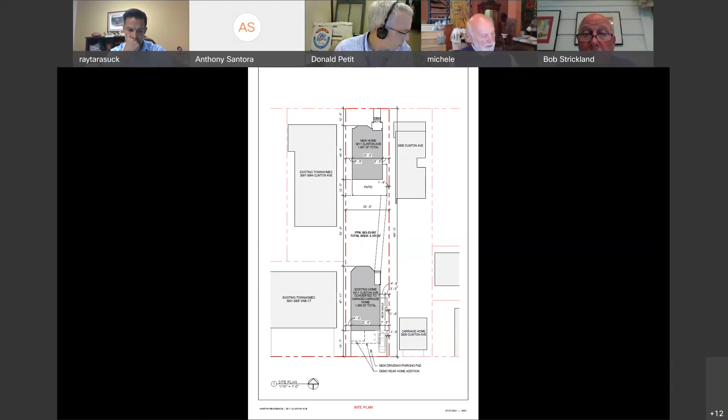Mr. Chairman, I'll just remind the commission that we saw this project as a concept plan on July 8th. There are actually two items to act on today. It's one project, but there are two buildings at 3811 Clinton, and we should review and act on both of them today, items 1 and 2. Do we need to treat each one individually or combine them? I think the presentation combines them both.

Okay, thank you. Excellent. Thank you very much, and good morning, everybody. Thank you very much, Don, for the information on the last Landmarks meeting. I will also note that last week we received approval from the Ohio City Design Review. So we now have Block Club approval and Ohio City Design Review approval for this plan proposal, for both new construction as well as the modification and rehabilitation of an existing structure on the lot. So just very quickly to highlight the scope of this project, this site plan here illustrates the project in its entirety. There is an existing home on the southern portion of the lot, which you see at the bottom of the site plan.

That house was moved, this is from Bob Strickland. Excuse me for a minute, Karl, I'm not seeing any presentation at all on my screen. I can see the participant panel at the top, but I've got a blank screen. It's labeled as Karl Brunjes's screen, but I'm not seeing anything.

I can see the presentation, Karl, on my screen here, just to let you know. I can as well, I can as well. Should I sign out and sign back in, Karl? That might help, if everybody else is seeing it, then it might be an issue on your end right now. Okay, I'll be leaving momentarily and then I'll come back. Just go ahead and continue. I'll join you. Okay, got it.

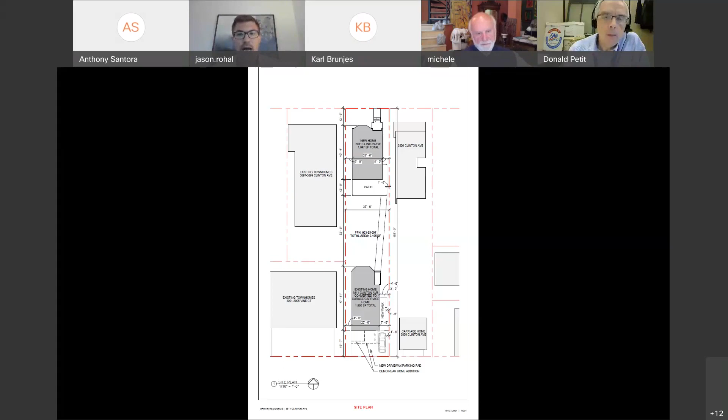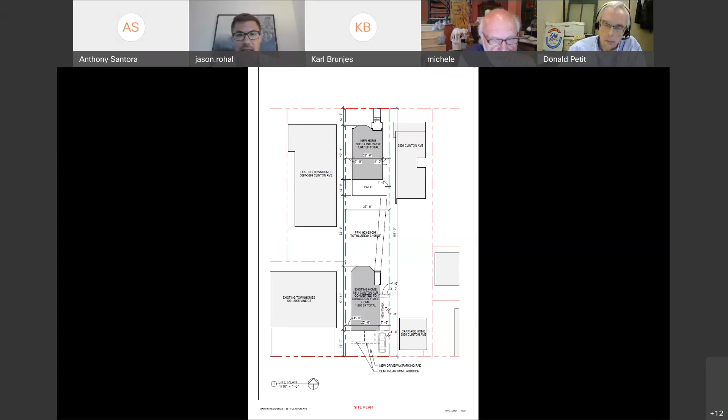So in the site plan here, you can see the existing home on the southern portion of the lot, which was moved from Tillman Avenue in the 1960s, and also on the northern portion of the lot, proposed new construction, just to the west, also a new home being built concurrently. If you could please advance to the next slide and keep going until we come to the north elevation of the new construction home.

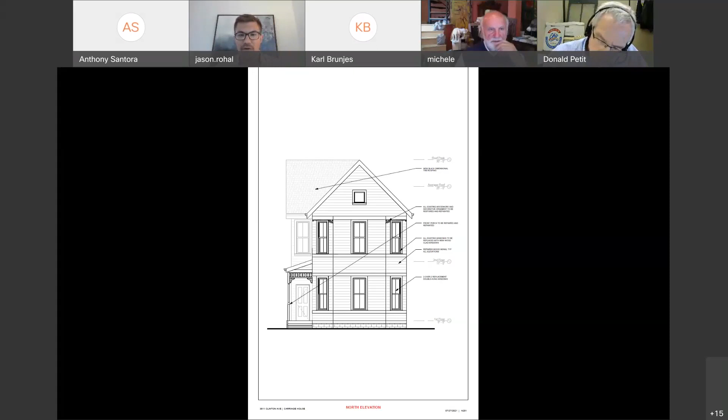This elevation shows in detail the proposed restoration of the home. Currently it is in disrepair. It is a wood-sided house, and we are proposing to replace with wood clad windows in a 2/2 double hung configuration. Any repairs and modifications will be using wood siding.

In some subsequent slides, we have the materiality, or proposed color scheme, for the existing home at the rear of the lot. This shows any historical ornament currently existing that has fallen into disrepair. We propose to bring that back, renovating historically using historically appropriate materials and fenestration.

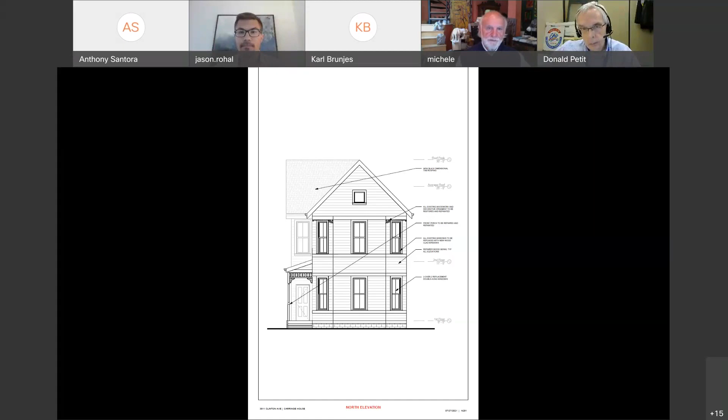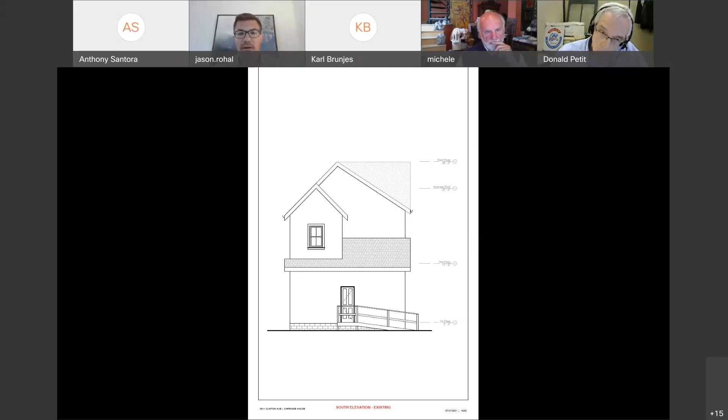On the subsequent slides, the other portion of the rear home involves a proposed modification. We've been doing some digging and engaged a local historian, Tim Barrett, who has been out to the site and walked through the property with us. We are also proposing, in addition to restoring the principal facade, the removal of a portion of the home at the rear that faces Vine Court.

If you wouldn't mind advancing to the next slide, please. The previous slide shows the existing conditions; this slide shows the proposed new facade, which allows the home to be converted to a carriage home.

Two wood paneled garage doors are added on the southern facade, with an overhang placed at that facade. Light fixtures illuminate the area off of Vine Court, along with new windows added on the southern portion of the house that match in size and configuration with the other facades. If you wouldn't mind advancing to the next slide as well, please.

So current existing conditions here, and the next slide will show the proposed modifications. And then the next slide as well, please, and then the subsequent slide will show the proposed modifications.

And then here we see the existing home. Again, we consulted with Mr. Tim Barrett on some historically appropriate color schemes for the home. All of the band boards, any trim that's found is going to be restored and kept. We're proposing Sherwin-Williams Roycroft copper red for the main body of the home, with the trim and accent colors shown as well here, as well as light fixtures proposed for the home. And I believe the only other slides here just show the massing of the modifications.

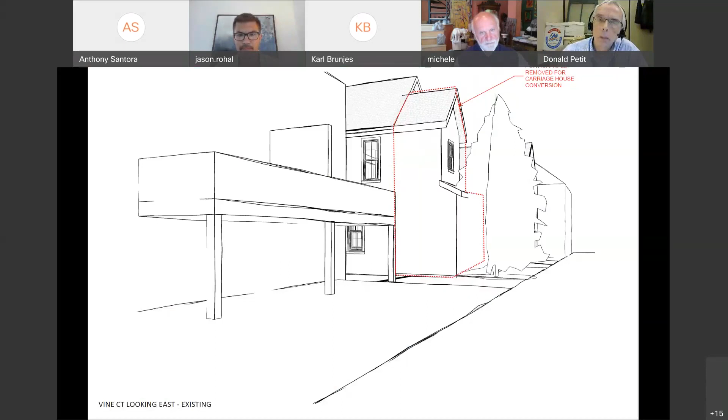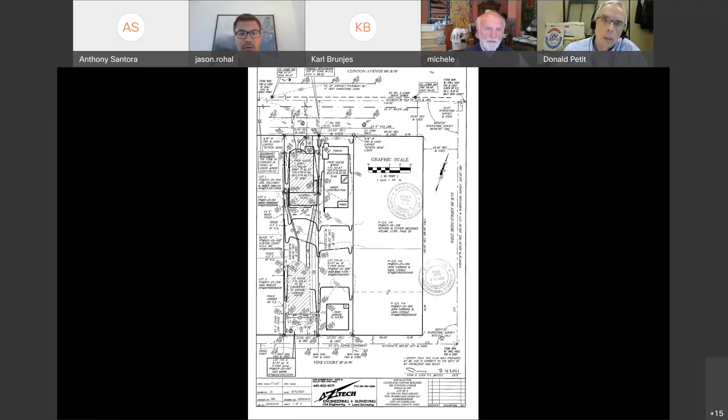And the next slide will show that removed. And then I have one from the other angle shown looking west down Vine Court here. And there we are, that's everything that I have for the committee. Happy to answer any questions regarding the new construction home or the proposed modifications to the existing home at the rear of the lot.

Mr. Chairman, Donna Gregonis is in attendance today with the Design Review Committee report.

Good morning, Mr. Chair and members of the committee. Thank you for hearing the local committee's comments. Again, this is Donna Gregonis with Ohio City Incorporated, Neighborhood Development Director, for those who may not know. Mr. Rohal did present the Martin residence to the local community, and the community is in favor of the proposed home and remodel. They did not have any negative comments to share with me.

And then the local committee, some of the comments they made were that they were still not totally happy with the overall look of the home, and wanted the designer to stick with really one style. But ultimately they did approve the design on the new home with conditions, and asked them to come back to the committee to review colors at a later date. Those conditions were to review the size of the circular window, that it might look better larger, and to change the window trim colors, trim boards, and portico gable color.

They also asked the designer to remove the copper color on the standing seam metal roof and pediment over the front door to something else. Black standing seam was proposed, and that seemed to be agreeable by the committee. I'm not sure if he changed it -- he did change it in the drawing, so that is shown. So it was approved with conditions listed, and they would like him to come back to review the final colors at a later date.

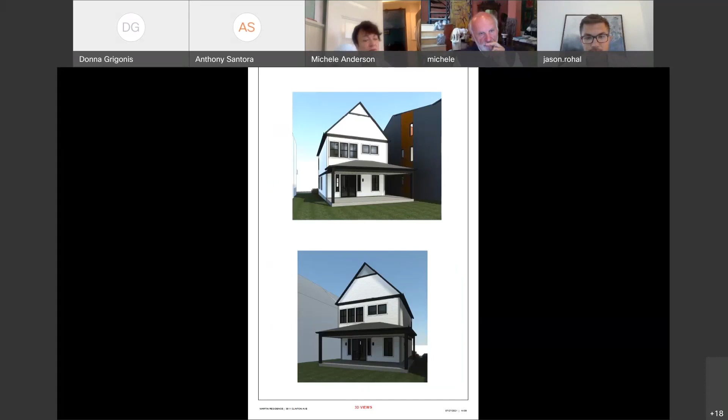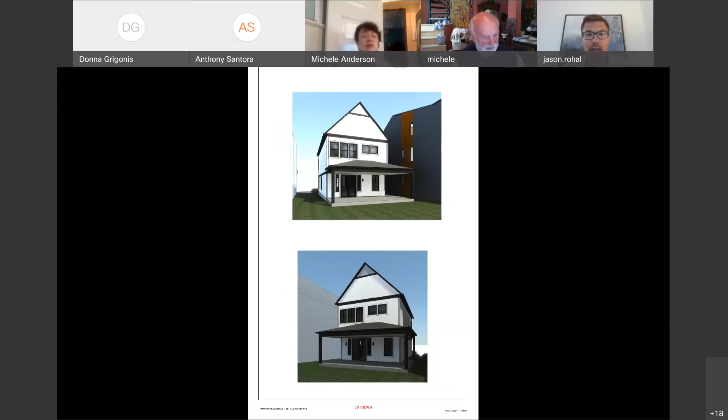It's my understanding from the presentation that the main body of the house would be the copper color. Is that correct? The main body of the home at the rear portion of the lot is proposed as the Sherwin-Williams Roycroft copper. There is no rendering right now -- we just have photos of the existing home shown with the color swatches here. Okay, I'm just wondering how that would look as the main field color for the house.

Without being able to see it, I really don't know, but I'm assuming you guys had looked at it and it seemed to be pretty okay. Yes, we had actually consulted with Cleveland Restoration Society as well as the local historian Tim Barrett, who proposed or accepted those as historically accurate colors. Okay, and then you guys are also maintaining and replacing all the trim boards, I heard you say, correct? That is correct. Okay, perfect.

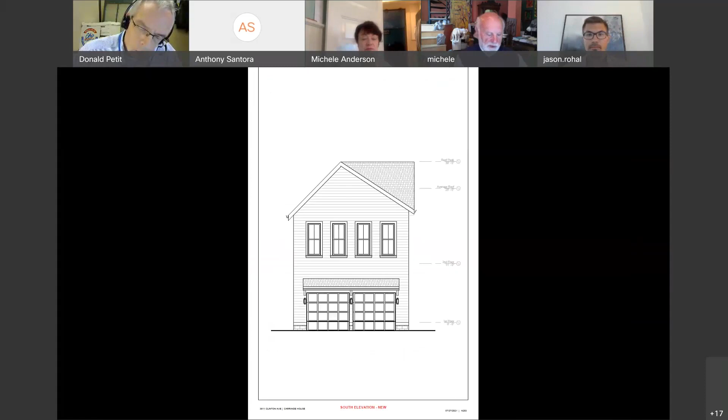I really want to compliment you guys, I think you did a great job on both the new home and the restoration. And I do agree, I feel that window, the circular window, should be a little bit larger, but other than that, great job. Thank you very much. Any other comments from the commission?

No other hands raised at this time.

Okay, so my comments are that we discussed this at length several times, and I think we finally came to the point where everybody's satisfied. Looking at this rendering, I have a question. So the white structure right now, this portion that we're seeing at the upper photograph, that all that

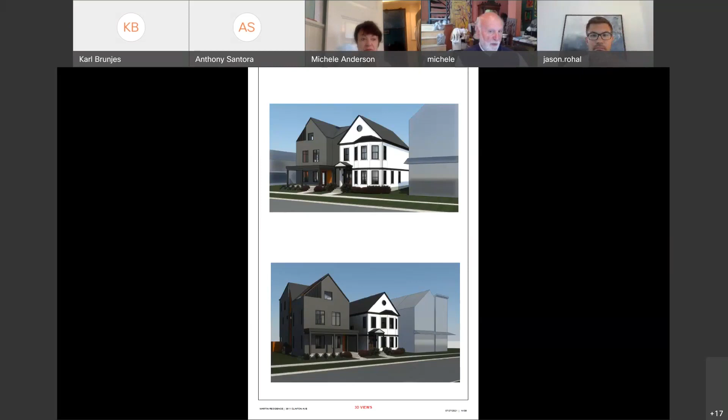white will be the bronze color, and the trimming will be the charcoal color. Am I right? Right now, all of the white that you're seeing will be white. It's coming off as very, very bright white right now, but it will be just a little bit of a creamier white, just a warm white, if you will. And then everything that you're seeing that is white right here, it will indeed be white. And the trim boards will be charcoal.

Very cool. And then the copper that you're referring to is only in the back? That's correct, and that's just the name of the Sherwin-Williams color. That'll just be at the rear house, in the back. Any of the copper color that was previously proposed for the new construction home has been removed at the request of Ohio City Design Review. Okay, thank you.

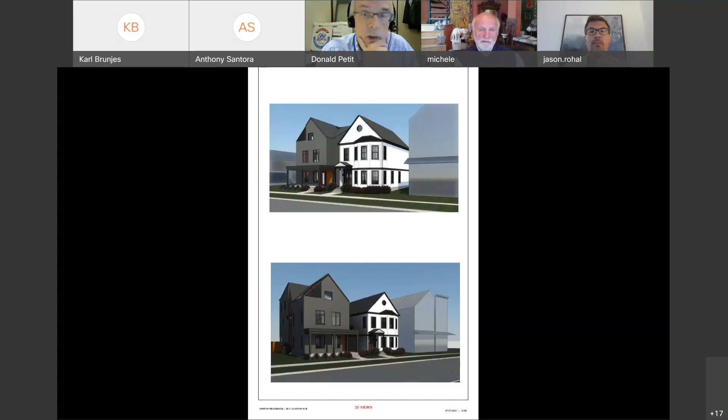Of course, for the work you've done, and I think we're ready to call for a vote. Just to remind the commission, we will need a motion to act on the new construction and the renovation of the house in the back separately. Will somebody make a motion, please?

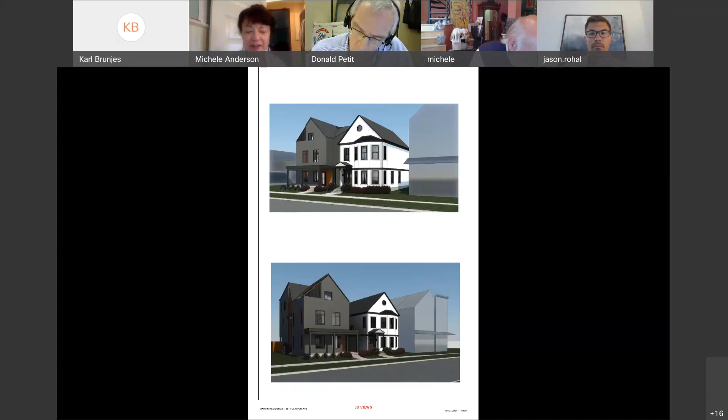This is Michelle. I make a motion that we approve as presented, with the applicant submitting the final color to staff and revising the size of that round window. I think that covers it. That's a motion for the new construction, Michelle? Yes. I'll second that motion. So we have a motion, we have a second.

Donna, could you call for a vote, please? Ms. Anderson, yes. Ms. Bailey... not sure you're with us yet. Mr. Bonezzi, yes. Mr. Colicchia, yes. Mr. Dreyer, yes. Mr. Santora, yes. Mr. Strickland, yes. Mr. Tarasuck, yes. The motion passes unanimously.

Thank you very much. Let's move forward to the next case, which is 21062, Ohio City Historic, sorry, number 3, actually. Mr. Chair, do we need a motion for the second portion of that project, for the restoration of the house? We do. I thought we combined the two into one.

No, that was just the motion for the new construction. I see, okay, well then. Do we need to go through the full presentation again, or should we just? No, we just need a motion and a second on the restoration of the building in the rear. Could I ask for a motion?

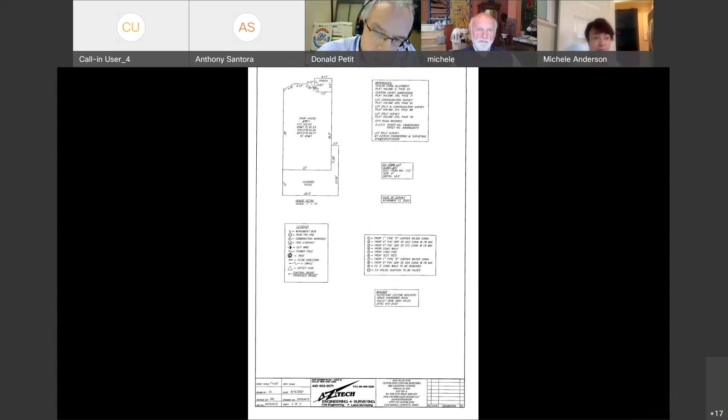Ms. Anderson, yes. Ms. Bailey. Mr. Bonezzi, yes. Mr. Colicchia, yes. Mr. Dreyer, yes. Mr. Santora, yes. Mr. Strickland, yes. Mr. Tarasuck, yes. The motion passes unanimously. Thank you, thank you very much.

The third item on the agenda, which we also discussed previously, is the 1966 Randall Road residence. Mr. Chairman, as a point of order, this was tabled on June 10th. Right, we need a motion to take it off the table. I see, okay. Will someone make a motion to that regard, please?

This is Alan, I'll make that motion. Thank you, Alan. Do we have a second? I'll second, this is Michelle. Thank you, Michelle. We have a motion and a second, so let's proceed with the presentation then.

Mr.... We should... who was giving the presentation? We should do a roll call vote. Oh, we should, yes, okay.

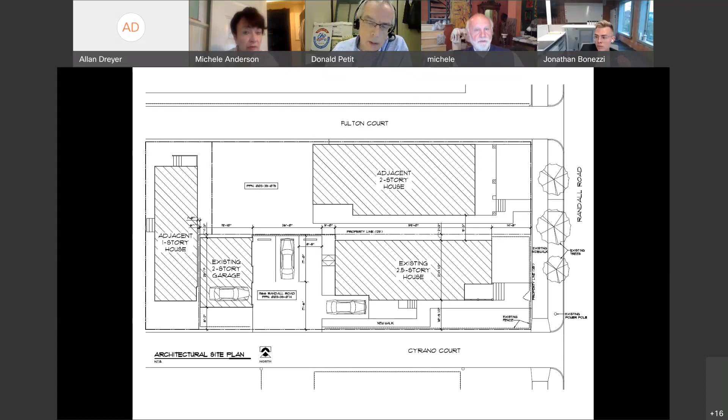Ms. Anderson, yes. Ms. Bailey. Mr. Bonezzi, yes. Mr. Colicchia, yes. Mr. Dreyer... Mr. Santora, yes. Mr. Strickland, yes. Mr. Tarasuck, yes. The motion is taken off the table.

Very good, thank you. May we begin with the presentation then?

Who's giving the presentation? Mr. Beegan? Yes, Mr. Chair, this is Paul Beegan.

I'm not quite sure how to proceed on this item. Two months ago we were before you, and we requested a complete list of modifications to the design so we could make those changes and resubmit them. We've done that, to the best of our ability. Last time Mr. Brunges had a presentation for us as well, so I don't know if it's worthwhile to have him or Mr. Petit go through our presentation and tell us where we didn't do what you asked.

From our perspective, we have made all of the modifications to the designs as requested by the committee. The last communication from Mr. Petit was that he thinks we got everything, but it has to come back to the committee. So at this point I'm not exactly sure how to proceed, other than asking that the committee review and approve the changes we made per Mr. Petit's direction.

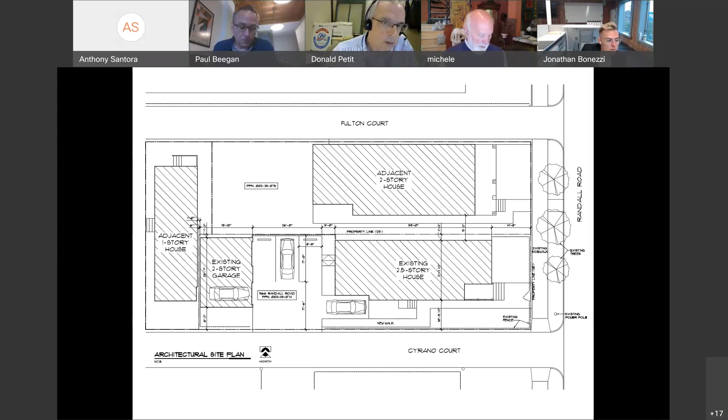And I shared that with the commission. I can go through all the items if you'd like, or we can skip to the slide showing the revisions, and if Mr. Beegan can go through and enumerate the changes, I think that would be helpful for the commission. That was your list, Mr. Petit. Can you, after reviewing the drawings we submitted, tell us if we did everything you asked as far as the changes on the drawings?

It would be odd for me to say, here's the list you gave us, and point out the list you provided, because we did do that. If you'd like us to open your document and go point by point through the list, I'd be happy to do that. Again, this is a little odd for me. I'm not quite sure how to proceed. We did our best attempt to make the modifications suggested by this committee.

Can I just ask a quick thing? This is Anthony Santora, sorry to jump in. I'll offer my two cents regarding this: Mr. Petit is not the applicant, nor the designer of the property. It is the designer's and the applicant's job to walk us through the presentation, not Mr. Petit's. He relayed the comments of the commission to you, you responded to them, and I think it would be more appropriate for you to walk us through. If you want to go point by point, that would be fine, but I don't think it's Mr. Petit's responsibility to do that today.

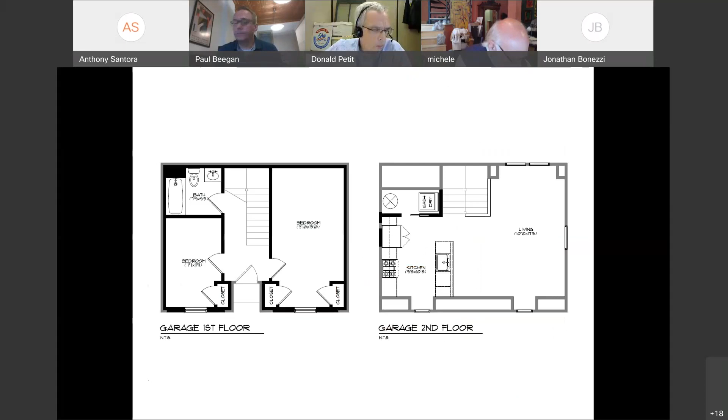So, this is Anthony Santora again. Mr. Beegan, can you walk us through, one of the requests from the commission last time was to get some understanding of the floor plan layout since the exterior windows had shifted around on the facades. Can you walk us through the shifting of the windows? Did you put them back to where they were, or can you talk to us about the spatial relationship as to why those windows were changed?

We did not change any window locations on the east or south facades, which are relatively where the house is most viewable. On the north side, which is approximately 8 feet from the adjacent house, there were some modifications based on the layout inside the apartment. They either shifted over slightly or were made

bigger and/or smaller depending on the location. The windows on that facade were not in any type of regular pattern prior. The elevation on the west side of the house actually, I think, only had one window in it and had an addition that has since been removed.

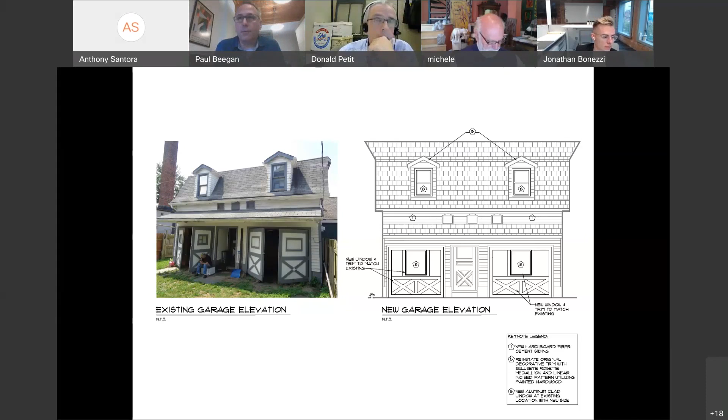The owner requested that the board kindly not make him reconstruct a chimney that is not there. The roof is on, the structure is on, the added cost, considering that he has had to wait 7 months now to get to this point from being halted on his project. And he's complying with tens of thousands of dollars of additional work to do all these additional details, so for the last item, the chimney, that the committee consider waiving it, as he would have to spend a lot of time and effort and cut holes in the roof that's already there to put that chimney back on.

As far as the garage piece, and I see they're being flipped through on the screen there, the restoration of the garage - really the biggest piece is that it's not going to be a garage anymore, that those are going to be bedroom spaces for the unit that had existed in this structure. So the garage doors are being removed and infilled with trim to replicate what the doors were previously, understanding that we are inserting windows into them.

Okay, thank you. Any other comments from commission members, please? Or questions or clarifications? Mr. Chair, Mr. Santora and Ms. Anderson have their hands raised. Mr. Santora, please.

Thank you, Mr. Chair. So I appreciate all the work that Mr. Beegan has done. I'm glad that the detailing has come back into the project. However, I do feel that it is appropriate that at least the front chimney be replaced. And I understand, Mr. Beegan, that you and the owner do not wish to have a chimney put back, which is not there. But let's be honest, it is only not there because it was completely removed by the owner illegally without getting approvals. So I feel that it is important that it be replaced. It is a major architectural feature on the house.

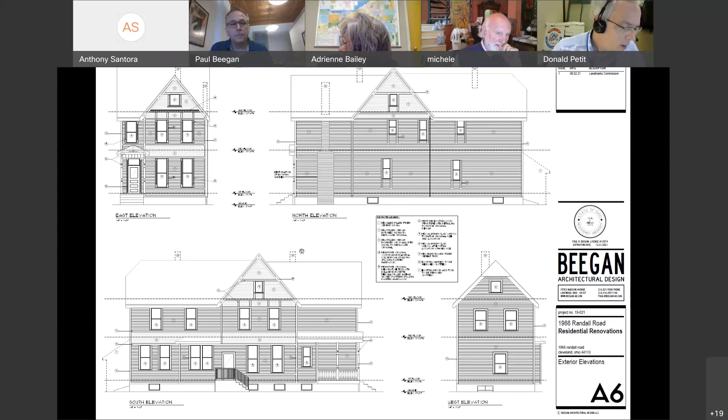They did approve it, but there were at least a dozen conditions based on that approval, and it was all based on restoring the existing details on the building, which I think is consistent with what the commission approved and discussed at the last meeting. So those details have been complied with.

Mr. Chairman, the one thing we asked for at the last meeting was that they restore, reinstate, or maintain the original architectural details on at least 3 elevations of the house—north, east, and south—including the eave details. And then we enumerated several of them. I'm not sure that all of those have been called out in the new drawings, things like the dentils.

I just want to make sure that we account for everything that the commission asked for in the last meeting. What do we deal with that? Specifically, those items that the commission requested, and how have they been responded to by the architect? Have they been responded to?

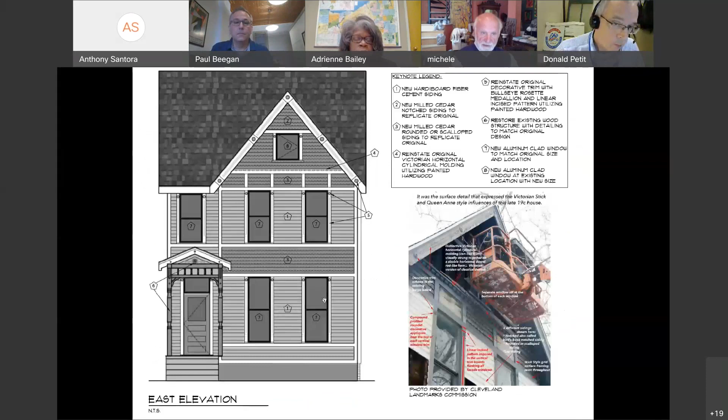Are you asking me, Mr. Chairman? Well, I'm asking you and Mr. Beegan, so these requests made by the Landmarks Commission at the previous meeting in June, have they been complied with? Yes, I think the drawings reflect a greater level of detail and restoration in the design.

I'm not sure that they include everything. I'm concerned about the eave details. I'm not sure if the locations and proportions of the original windows on the north facade have been restored. Obviously, the chimney hasn't been replaced. Beyond that, I think it's an improved design.

I did share with Mr. Beegan's firm that Tim Barrett referred someone at Cleveland Lumber to the applicant who can turn historic details and replicate them, even if it's in synthetic material. I just want to make sure that whatever our motion is today, we account for everything raised at the last meeting, including the chimney, which was an issue at the last meeting as well.

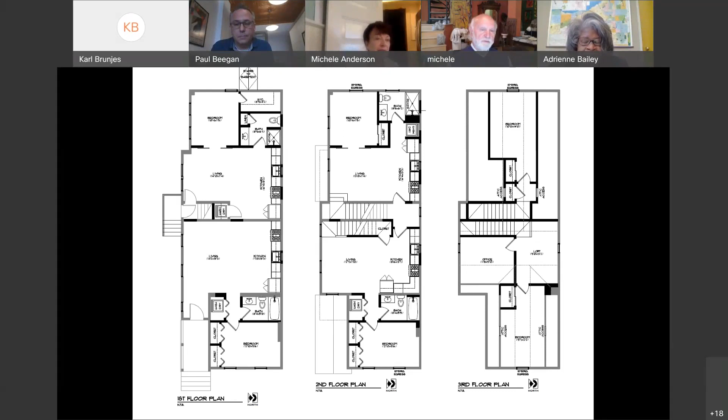So that's another option that can be looked at by the owner as well. That way it may not be functional, but still a replica of that same feature of that original chimney could still be there. Remember, it was two chimneys there. We just told the owner we're just gonna look at one, but at least looking at that north elevation, something is still missing there.

So I agree that the chimney somehow should be restored. I understand the finances of the owner, but somehow the owner should look at that. Another option is just to put something imitating a chimney there, but non-functioning. So that's how I feel a chimney should be there. But again, something should be shown on the light fixture, I didn't hear anything on that. And the landscaping as well, shown to staff. So those are my comments.

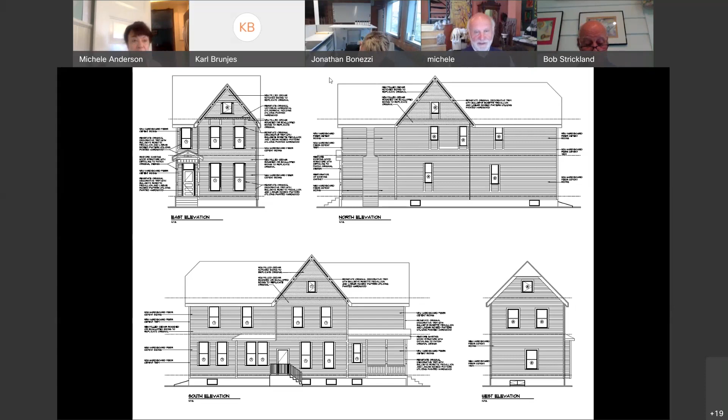I think the comments made at the last meeting in June included this list. It wasn't presented as a formal list, but the comments were made, so if someone, including Mr. Beegan, was taking notes from that meeting, he would have had a list of our comments. I just want to make sure we're okay with any further comments pertaining to the architectural features and details, so we can put that to bed for a second and get to the chimney issue. Mr. Chair, you have Ms. Anderson and Mr. Tarasuck with their hands raised. Ms. Anderson, please.

Michele, I can't hear you. So sorry. Thank you, Mr. Chair. I'm satisfied with the level of detail presented here. My comment was more a chimney comment, so I can wait. Okay, well, let's go to the chimney then, unless there are more comments.

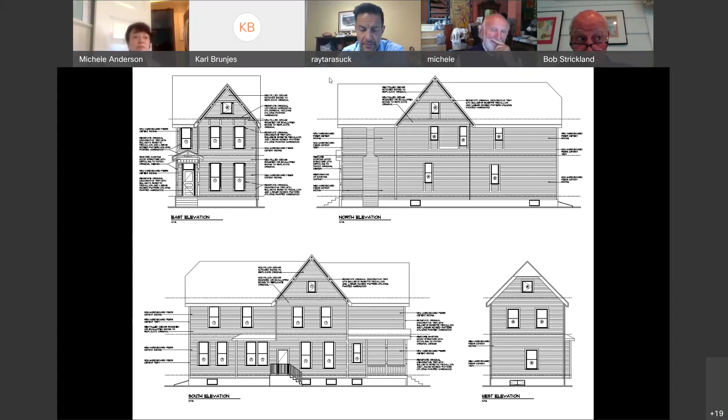Go ahead, sorry. Does Mr. Tarasuck want to make a comment? Yes, I would, and thank you very much for the time. I do agree with Mr. Strickland's comments, and I really appreciate the chair parceling out the issues, if you will, between this list and the chimney.

I guess my question would be, and we've gone back and forth with this, there does seem to be a level of understanding, but not necessarily complete and full understanding with respect to this list. Is there a way during this meeting right now that we can get a copy of that list to the applicant's representative just to review it? It's not a very long list, just to review it so we've put it down to a fine-tooth comb.

It looks as though all of those particular issues, absent the chimney, have been addressed, and that's what we've been saying here, that it looks like all of those things have been taken care of. Mr. Strickland's comments, though, are very well taken, that the Landmarks Commission and Mr. Petit have always been very, very helpful with every single applicant here. If there was a way that that particular list could find its way to the representative right now, and since we're here and not getting back, can we do that?

I agree that it does seem that they have all been done and addressed, absent the chimney. But just to put a fine point on this, is there a way we can do something like that? Thank you. Now, Mr. Chair, if I may interject, I think there's a little confusion by some committee members. So what occurred at the June 10th meeting, we did meet, and again at that meeting I requested exactly what we're discussing right now, because with each committee we'd been through in Ohio City, I would take my notes, we'd make the revisions, we'd send it in, and then at the next meeting there was, well, we want this. So that's why I was so adamant at the June 10th meeting that we have that list prepared.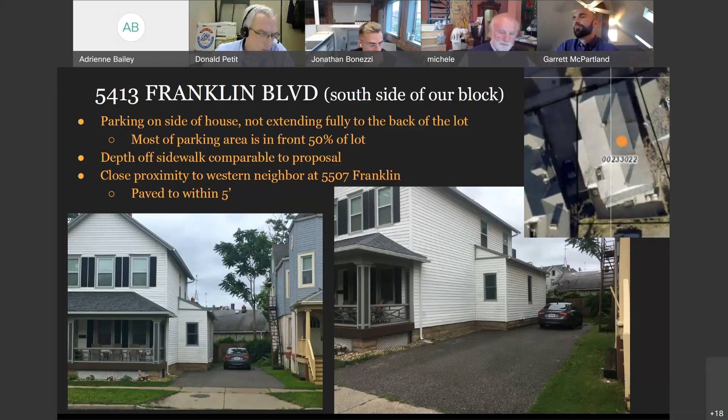When you drive through the neighborhood or walk through the neighborhood, I think you see examples that are very akin to what I'm asking for. This is West Clinton, and this is West Clinton.

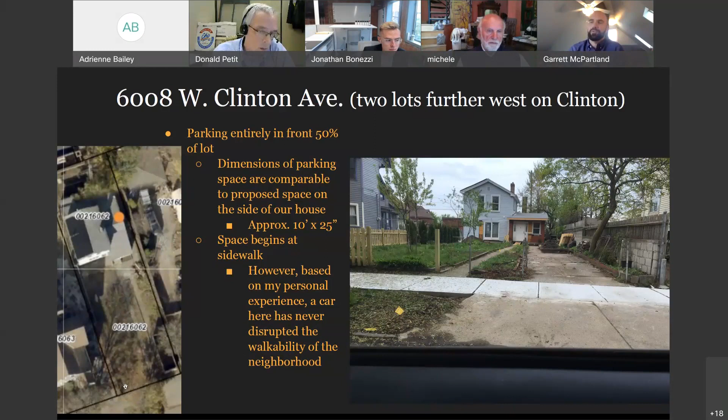So that was just a quick walkthrough for specific properties. The next four slides are just to give a broader view of when you walk around the property, walk around the neighborhood, the kind of thing you see in terms of how people typically park.

These two highlight what you see a lot, which is sort of semi-permanent fencing. There's a driveway that goes to the rear, but there's a fence put up that is not opened and closed on any normal basis. It just seems like people have fenced in their private backyard, and then they enjoy their parking on the side of their house beyond the house line, which is, I think, how my proposal would look, because there would be a 6-foot fence right after the driveway.

Then there's also the realistic way people enjoy their parking around the neighborhood. And I put this in here again, not because I plan on parking on the grass in my front yard, but just to show that there's a wide way in which parking is enjoyed in the neighborhood, and none of it diminishes the walkability of the neighborhood. No one is on the sidewalk, from what I could tell walking around.

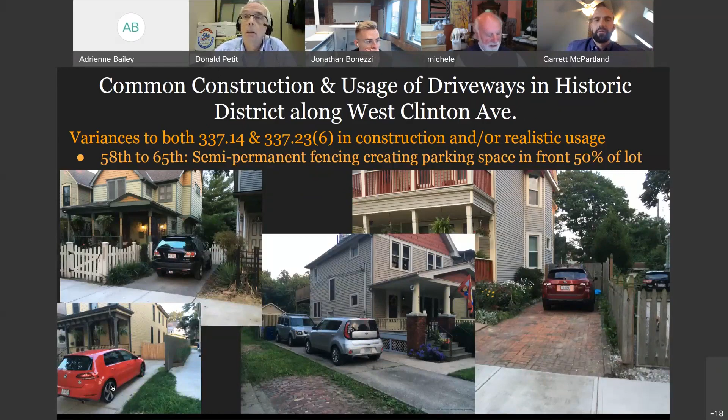Well, again, I think my comments are that parking in these historical neighborhoods is always an issue, as it is, for example, in Tremont, where you have some driveways that are barely over 9 feet. I think you've proven the need for a driveway for your home. I'm not quite sure what position we can take as landmarks, when I believe that the major issues really are with compliant codes.

Mr. Petit, do you have any comments regarding that statement? Thank you, Mr. Chairman. We did run this by the zoning section in city planning, and Kyle Reese gave us this response. He did cite the two parts of the code that would be in violation if this were approved.

That's part of Mr. McPartland's presentation. He also added, in my experience, BZA almost never grants those variances, and I've never advocated that either of those provisions receive a variance. Providing a driveway to a spot that is not in the rear almost always, in practice, ends up with cars parking in the front yard and/or across the sidewalk, completely contrary to the city's walkability goals. There is no legal right to an off-street parking spot, and therefore there is no hardship. Thank you.

We're here today because this is an exterior change to a property in a historic district. Ultimately, it's going to be up to the Board of Zoning Appeals to determine if a variance can be granted here. But we have to take into account the code in our deliberation on the physical change here, and we have to decide if this amounts to a change in the character of the district that's adverse to the rest of the neighborhood. That would be my take on it.

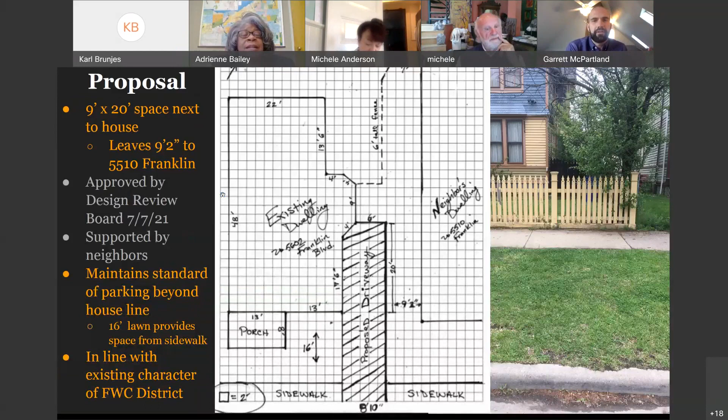So there's an access way that you would turn into from 57th. That's currently, in the screenshot there, being used as a driveway, coincidentally right now by the property to the north on 57th. There's cars idling and parked there.

But my main issue was, I think Mr. Santora mentioned it's, I believe, more than inconvenient. I think there's a lack of safety going on with this access way because, again, there's a front door pictured right there. There are people who are constantly kind of in this alleyway, which is 9 feet 8 inches, where that stoop is. So I think I have real concerns that go beyond convenience.

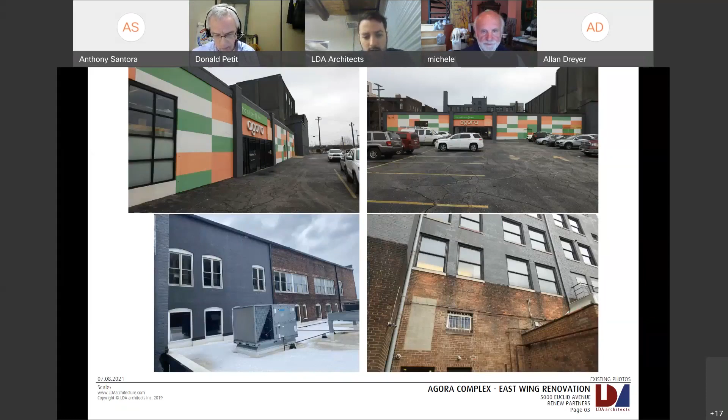Here are some more photos of what the back of the building currently looks like, and the back of the tower, showing where the masonry is painted and not painted.

Here's the overall site plan. For this review, we're looking at the renovations of the east wing elevations and painting the full south facade, where you saw the green, orange, and white checkerboard pattern, as well as the painted portions of the west tower and the east tower. There's some courtyard landscaping against the east wing that we're also updating, including a little more hardscape and new plantings. The canopy in the middle of the courtyard will remain as is.

This is a reference plan for converting the east wing, which was the former recording studios for WHK and WMMS radio stations, into a usable office space. Part of our historical tax credit program requires minimal window openings to the exterior, so we're providing several skylights to get more natural light into the space.

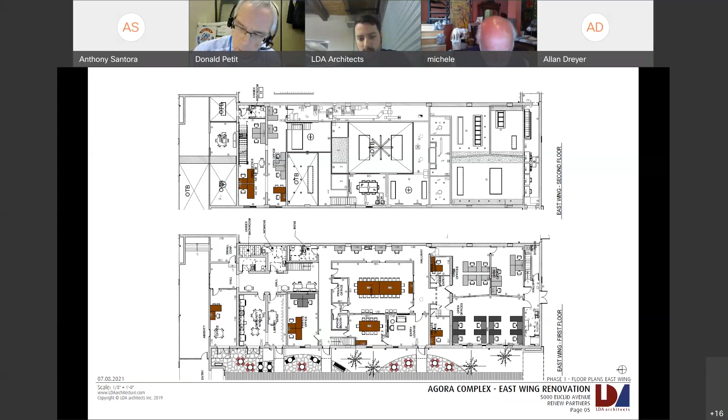There's the roof plan showing the number of skylights. This also includes a new penthouse that goes up to a roof deck on top of the east wing. The penthouse will be clad in thin brick veneer that will also get painted to match the west tower painted brick, which is part of our SHPO and historical tax credit review on how that gets clad and treated.

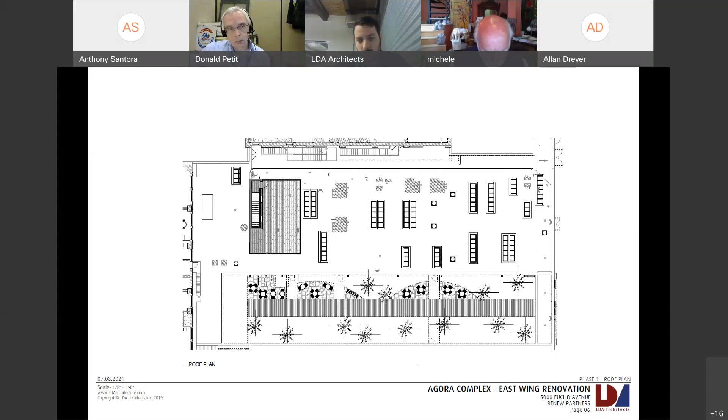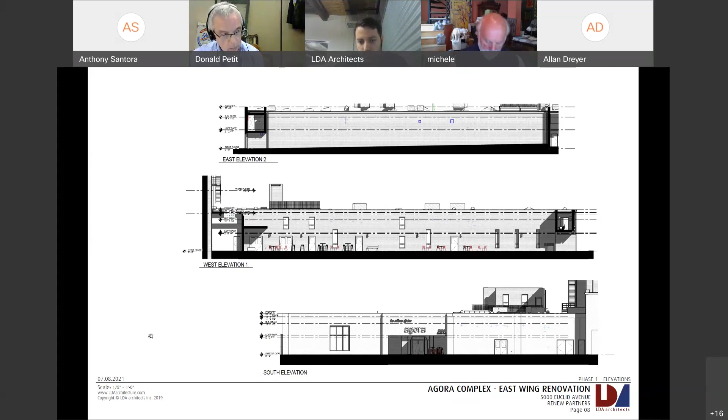This is a broader south elevation of the east and west tower. You can see in the white in the background where there's a downspout and where the Agora marquee sign is - that's roughly the line where the east tower gets painted up to. The chimney and penthouse on the taller tower will get painted, and the painting stops right below the second floor windows, right below where the fire escape is, then goes to natural brick, which is how it's painted now.

Here's the rendering and then the actual paint colors that are proposed for the project. The WHK paint scheme and coatings will remain the same, as that's a separate ownership group.

But the rest of it, the south face of the tower, the south facing elevations of the east and west wing, will get painted the Roycroft copper red. The inside of the courtyard will be the Westchester gray. And then the lighter Chelsea gray is the banding columns on the south facade of the wings in the back.

The new window colors will be the light bronze anodized color, and that will also be the same for the skylight frame color as well. And then that's the view from Prospect Avenue.

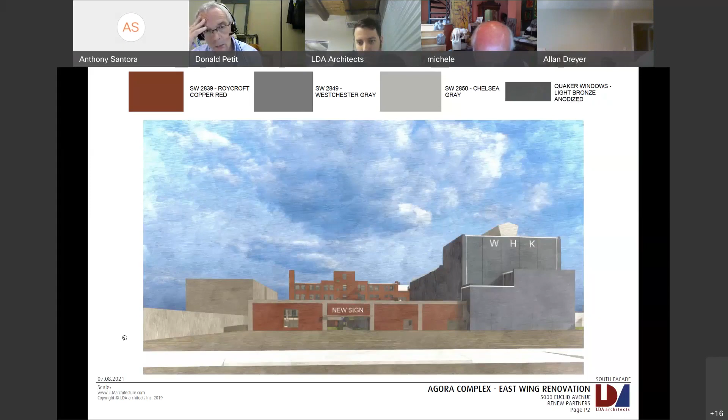And then just another close-up of the tower where you can see where the transitions from the existing brick material to what would be the new painted Roycroft red.

I think one of the questions we got asked during our last Euclid design corridor is just where the paint stops and starts. Basically we're matching the existing paint line of what was there originally. I believe it wraps around the chimney to the left, and then terminates at a brick joint where the two different brick materials abut, so there's a natural vertical joint there. And on the right side of the picture, the paint line stops behind the downspout, basically.

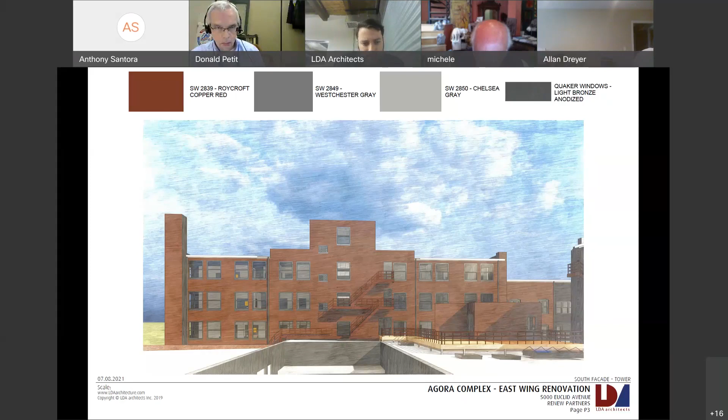And then you can see how the penthouse blends in with the tower in front too, so it's not a noticeable feature. You can't see the penthouse. There's limited visibility from Prospect Avenue and then almost no visibility from the courtyard side.

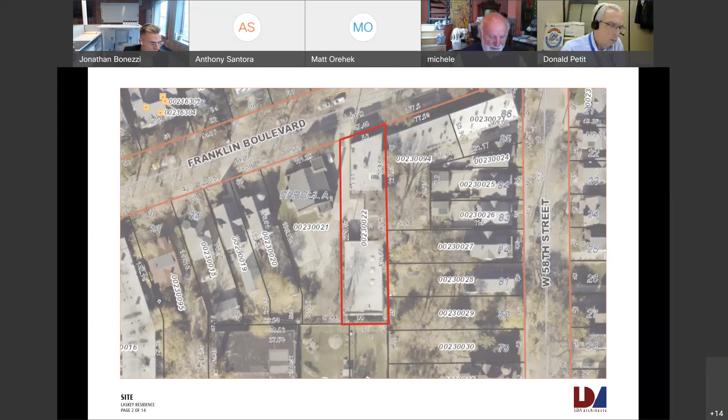Next slide, please. This is just a context plan showing in better detail where it sits within the neighborhood. So obviously the historic building that fronts Franklin fits within the context, whereas the other larger garage building sits behind, nestled within the site and behind adjacent residential properties to the east, and a church and church parking lot to the west, as well as the former commercial space to the south. Next slide, please.

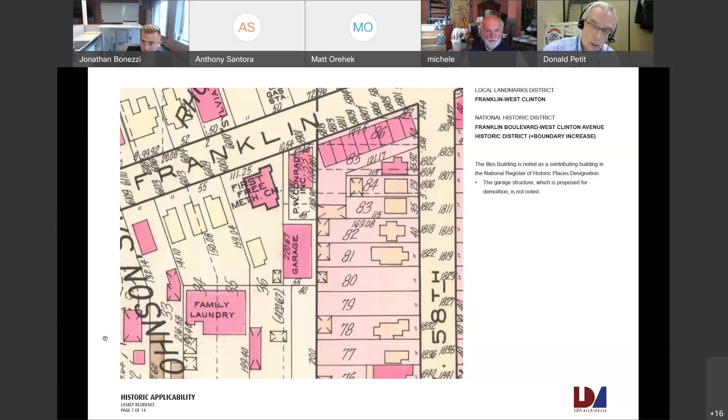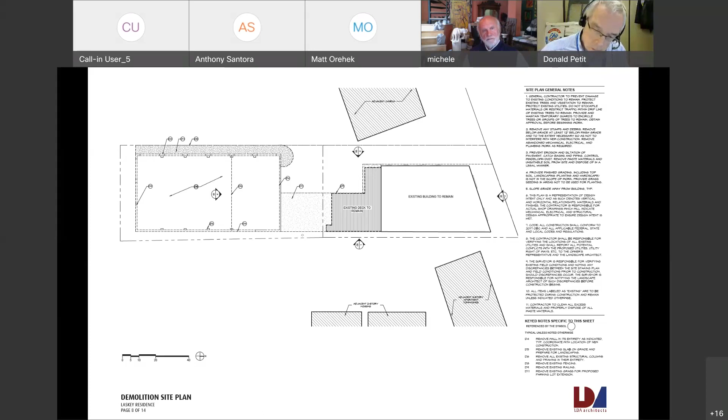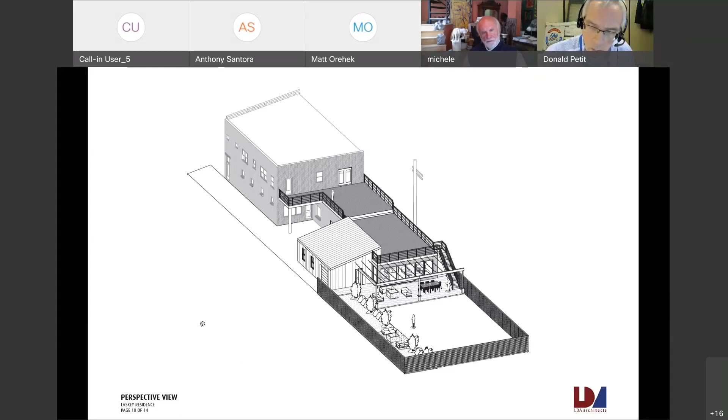If you go to the next slide, it's another perspective from the other side. There's currently a utility pole pictured here that we're providing at least 5 feet of distance from - we'll build around it. It provides a line to the building we're planning to demolish, but doesn't currently serve the historic building, so we wouldn't even need to use power from that for the proposed addition.

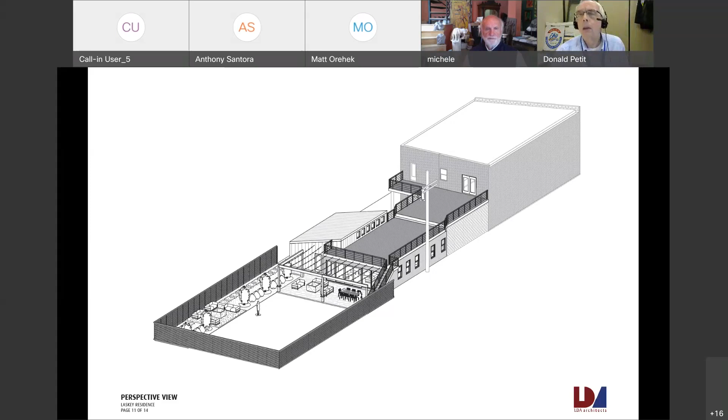If you go to the next slide, this is showing from Franklin how the addition is viewed from the street. It's shorter stories - only one story - and it's much less visible from the street than the existing building was.

If you go to the next slide - these are the proposed materials we were thinking of. There was previous conversation about designing these additions to mimic the existing garage, but with the lack of salvageable materials, we didn't want to propose something that wasn't effectively designed to mimic the historic aspects of that garage. There are multiple other additions or properties in the area utilizing more modern materials.

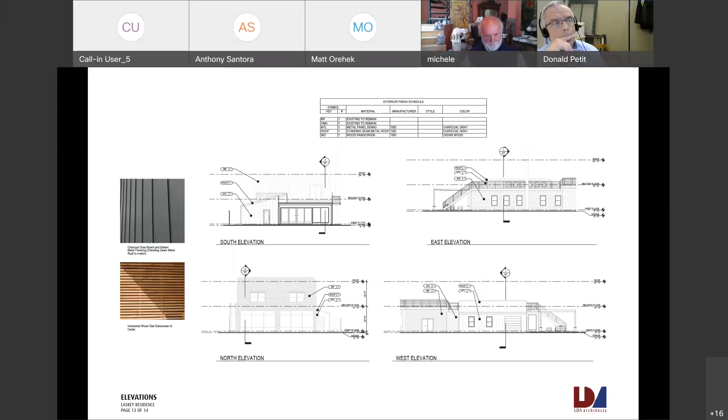Again, the visibility from the street is minimal, so we feel this can be achieved in an aesthetic manner. I think that might be the last slide - yeah, just some sections cutting through, showing how the size plays with the existing historic building.

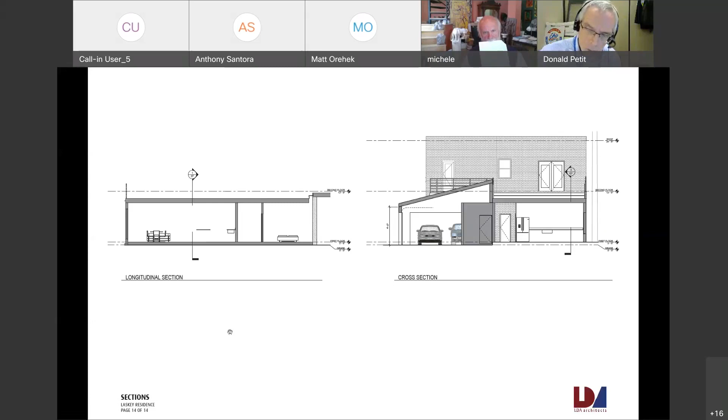We were also approved by Franklin West for the conceptual plan and for proposed demolition of the building. Thank you.

Mr. Pena, any further comments? Just wanted to confirm this was reviewed by the Franklin West Clinton Design Review Committee. They did approve the demolition. Their comments about the new construction included doing a survey for orphaned storage tanks underground near the garage. They asked about a tree preservation plan as the project progresses, and there was some concern about the vertical metal siding proposed for the new garage, which is visible from Franklin Boulevard. But they did take action and approve the demolition. And Karl Brunjes has a presentation on the history of that structure and the site visit to the property.

Great, wonderful, thank you very much. I did the history on this.

The garage in the back actually predates the building in the front by 3 years. The new garage was built in 1921, and then the store and suites in 1924. There were 2 permits for gas tanks, one of which was a portable gas tank, so I'm guessing that's no longer there, but I don't know if the other one was removed - it may be about 550 gallons potentially, or however much is in there, if anything. So that will need to be researched.

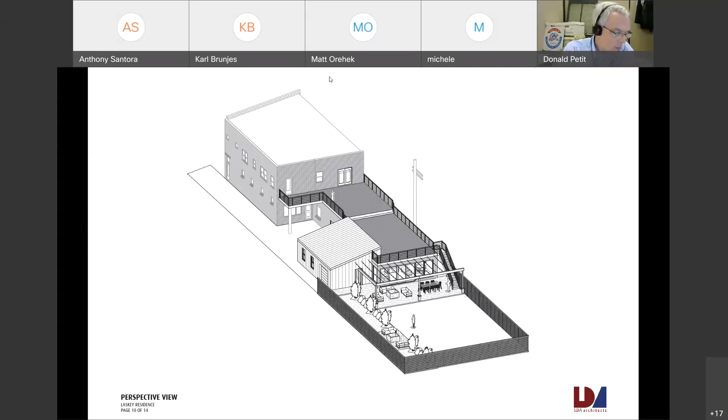Carl, thank you. When you did the site investigation on that back building, what was the structural condition? It seemed like from some images it was pretty degraded, and in others it looked okay. I'm just wondering if you got a sense of how well maintained it was. I believe the applicant stated it was not very well maintained, and you can tell from the exterior that there are some maintenance issues.

So I'm just wondering as to the viability of it as any type of long-lasting structure. I didn't think it was in the best condition—I've seen worse. I know there had been some conversation in the past few years about converting it into something else, but I don't know if that would have been viable at this point. A lot of stuff has been cut up, and I don't know how that would affect it structurally if it was converted into something else.

Okay, thank you. This is Matt at LDA. Carl spoke briefly about the potential for a use conversion. That was actually the original intent of ownership—to turn that into their residence and reconfigure and reprogram it to be a residential space in addition to the building up front. But after going through some initial planning, they determined that the building was too dilapidated to feasibly do that in anything other than an extremely difficult manner.

Okay, further to add to that—thank you, I appreciate it, and I appreciate that you guys looked at rehabilitation first before just coming in to demolish it. I have no issues. I always hate to lose older all-brick buildings, but as Carl said, this isn't really going to be seen from the street.

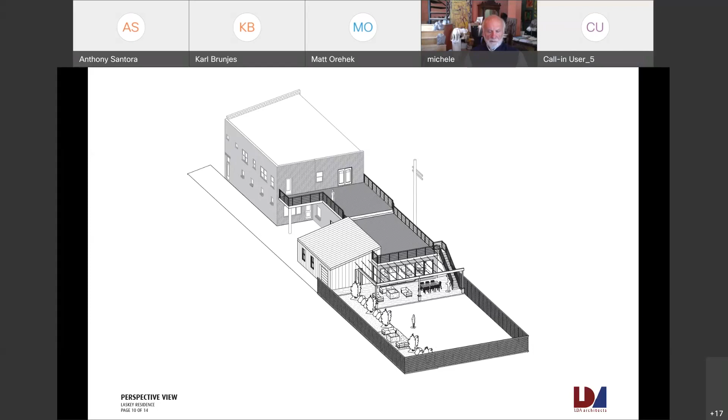I think it services the adjacent property, and then there was just one single line coming back to the garage that we proposed to demolish. So it's being used with other properties, but not for us.

Okay, thank you for the clarification on that. Other than that, I think it's a good project, and I look forward to the restoration of that front building.

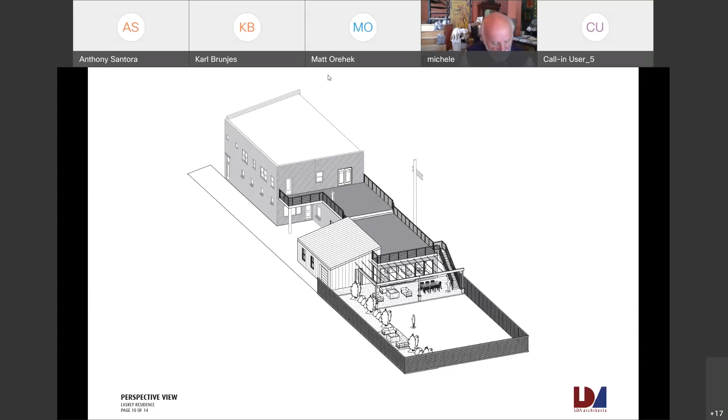Thank you, Mr. Santora. Any other comments? Mr. Chair, Ms. Bailey has her hand raised. Ms. Bailey, please. Yeah, two of my questions were asked by Mr. Santora.

Could I look at the overall site plan, like where the existing building is and where the new one is going to be? Well, like before, if I can see a site plan somewhere. Okay, yeah, that's fine.

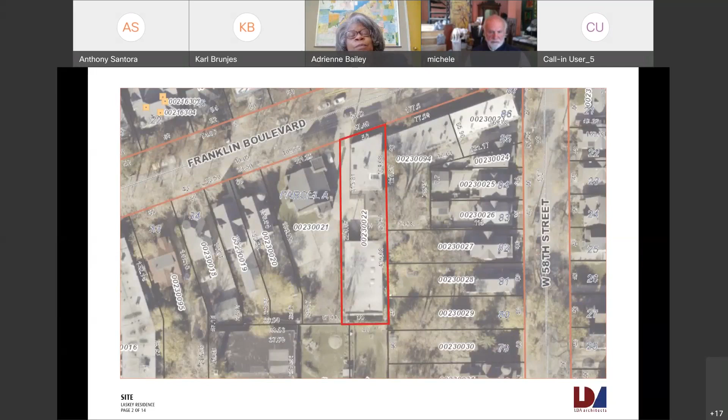So the garage - is everything on here being demolished, or both buildings, or just the garage? Which one is the garage? I'm looking at, okay, that's the one that's being demolished. All right. Correct.

And based on your presentation, Carl, you mentioned the underground tanks and stuff. Do you know which building has those, or you don't know that information? Do you know if the garage may have had it, or what was the function of the garage? It would have been related to the garage specifically. Okay, all right. So I will have to question that for the owner.

So when you demolish the building, have you done any study? I can see that you may not have. Have you done any studies on how you're going to remove the underground tanks, to make sure the soil is not toxic and it's clean before you develop the property? Is that part of your plan?

Sure, so at this point we have not done any studies. We wanted to get our approval first to demolish before we reached out to environmental engineers and the necessary individuals for hazardous material testing. So certainly we would reach out to the necessary professionals prior to the demolition.

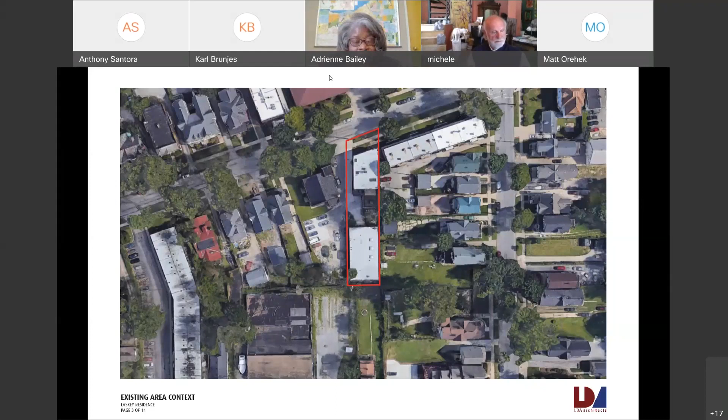Yes, I understand, elevation-wise above ground it might be safe, but I just wanted to put that out there, just to let everybody know. Now back to the drawing - I just have a few questions on the deck.

So is that your deck, right? I didn't hear much about what type of material is on your deck, and more information about your railing - what type of material is that? And I see you have steps right there. What kind of material is on your step down or on your steps?

The material of the shed roof addition is like a metal panel, and I think someone made a comment earlier - I think Anthony did - about there not being an extension of the roof line, and that is done on purpose. It's supposed to be a seamless transition from the wall up to the roof, like the metal wrapping up and around as one form, and then the other portion where the living space would be is like a horizontal or vertical wood slatted rain screen.

And then there's already an existing roof deck that is a composite decking material, waterproofing decking material, and we would propose to purchase more of that and continue that decking on top. The stairs have similar treads to the decking on top, like a composite weatherproof material. And the railings would be just a black metal railing with cabling within.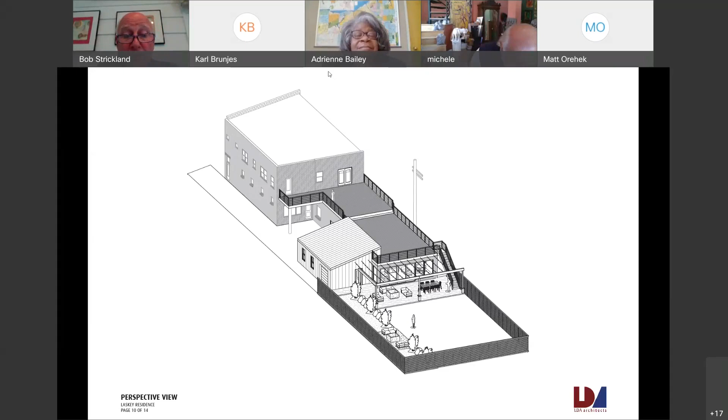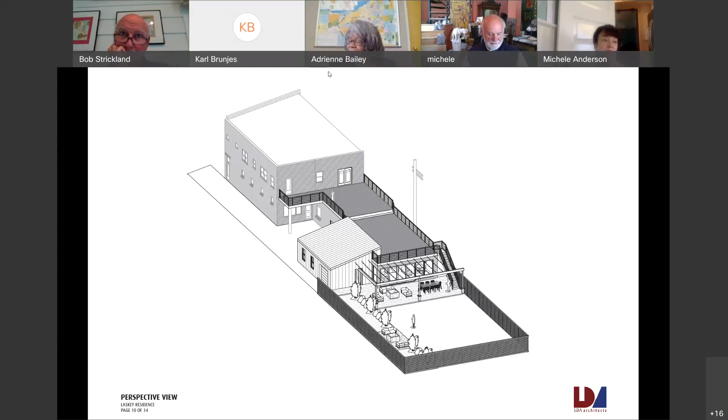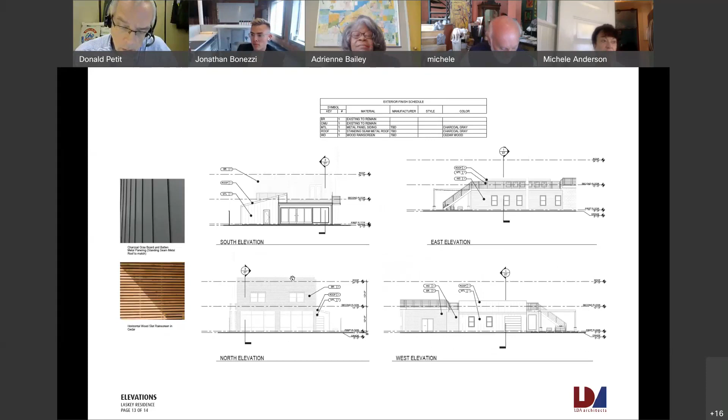Mr. Chair, are you ready for a motion to approve the demolition of the garage? Yes, please. I move to approve the certificate of appropriateness for the demolition of the garages proposed by the applicant. Will someone second it? This is Alan, I'll second. Thank you, Alan. Mr. Petit, would you call for a vote? Ms. Anderson, yes. Ms. Bailey, yes. Mr. Bonezzi, yes. Mr. Colicchio, yes. Mr. Dryer, yes. Mr. Santora, yes. Mr. Strickland, yes. Mr. Tarasik, yes. The motion passes unanimously.

Great, thank you very much. Thank you, everyone. Our next project is the concept plan for Tremont Oaks Phase 2 on West 14th Street. We've seen this before also.

I'm trying to get my video to work, Mayor, but it won't work. Is everyone hearing an echo? Yeah, we can hear you. You can hear me? Yes, we can hear you, Rick, but we can't see you. I don't know why the camera isn't working. I'm getting terrible feedback. Let me introduce the project quickly and let Dan start the presentation. I'll close and try to answer. Rick, you're signed in twice—maybe if you closed one of those, we wouldn't have the echo.

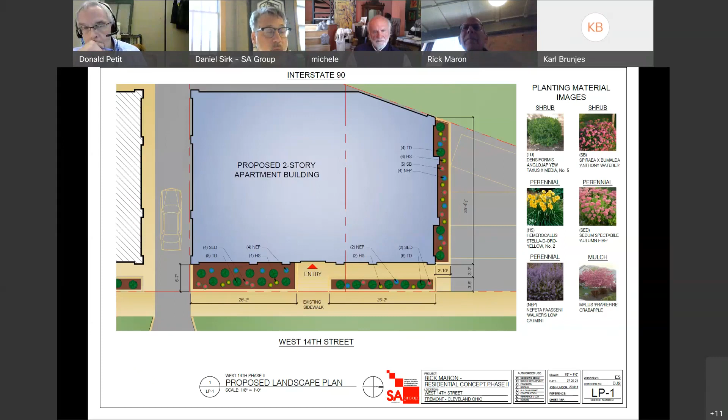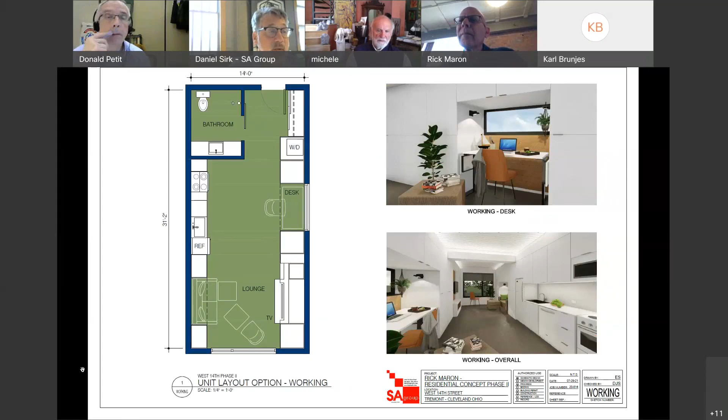I think everyone's familiar with the micro units, so unless I need to go back to these slides, Karl, we can probably skip through unless someone has a question. We will come back to this slide, but what I'm going to point out is unit 4 and 8 were the units that we modified based on the comments from Tremont. I'll get to that when we show the renderings. Move along, Karl.

So this is the view looking down West 14th as you approach. In the previous presentation, the center bay of the building did not have windows. It had a blank facade, similar to what we concluded on how to handle the south elevation. But Tremont felt that now, this being a more primary focus as you approach the building, it needed a little bit more than what we did on the south of phase 1.

So what we did was went back to the floor plan and said, can we do something to take the kitchen wall off of the exterior so that we could open up additional glazing along this facade? We walked away from the meeting with Tremont looking at landscaping, maybe some other architectural articulation of the facade, but we really heard them say an extra window or 2 windows would be the trick.

So we revised the plans, and we can go back to those if anyone has questions, but we basically flipped the unit over so that the blank wall generated by the backsplash of the kitchen is no longer on the exterior. Now the nook for the table is on the exterior facade. So we can move along.

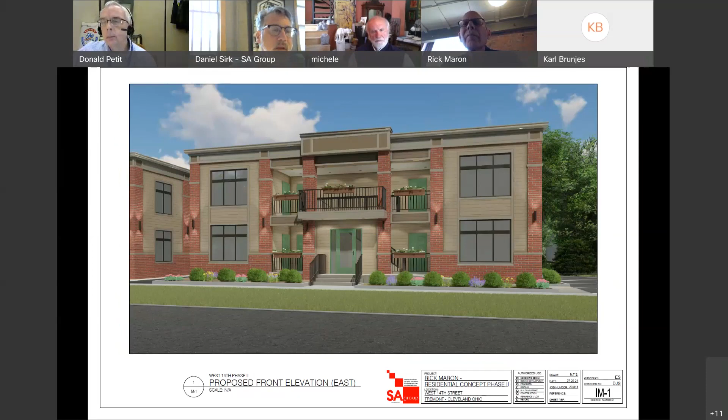We obviously look for conceptual approval today, and then we plan to take this back to the Tremont group for their commentary on this. Karl, you can move along.

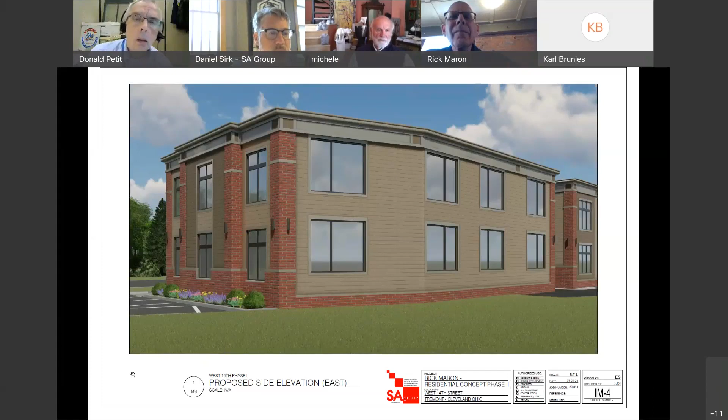You can see the portion of the building that would be difficult to recognize because it's very densely forested behind it as the buffer to the freeway - this is how we handled the turn of the building at the rear so that we respect the property line.

Thank you very much, and that concludes my presentation. Oh sorry, all the materials are the same that were approved in phase 1, as illustrated. So again, that concludes my presentation. I look forward to any comments or questions. Thank you.

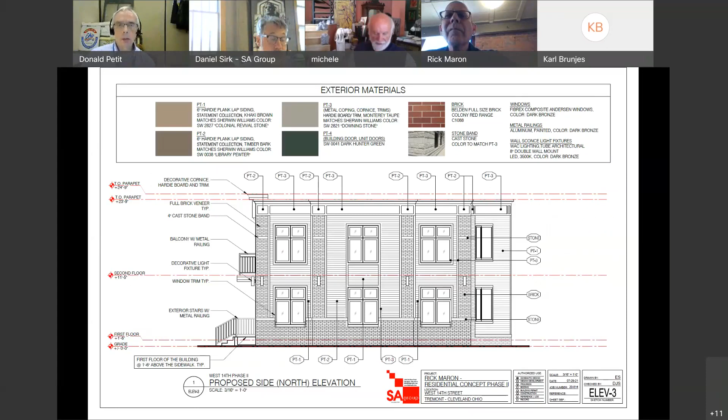Comments or questions from the commission, please?

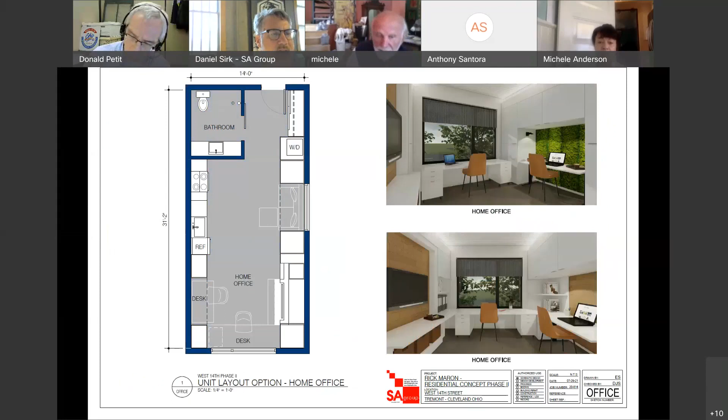This is pretty much identical on the West 14th facing side to the building that's already constructed to the south of this, correct? Are you asking the architect? I would not say identical, because we took the opportunity to add additional windows on this elevation. Okay, but the windows are on the north elevation, correct? Correct. All right, the eastern front is pretty much identical to the one next door. That is correct. Yeah, it's very reminiscent of the buildings across the street, bookends - the two apartment buildings on the corner of Fairfield. That's correct.

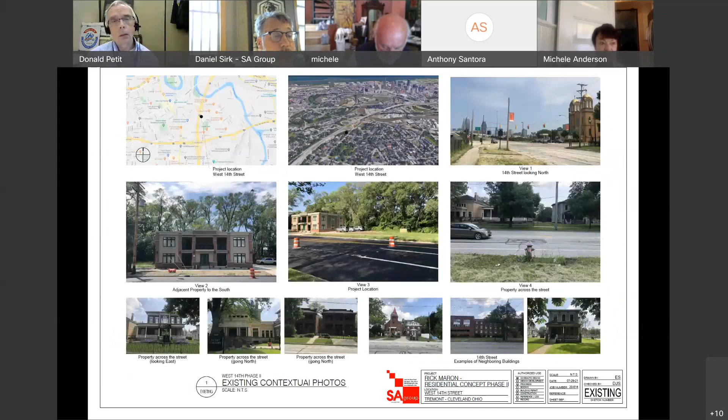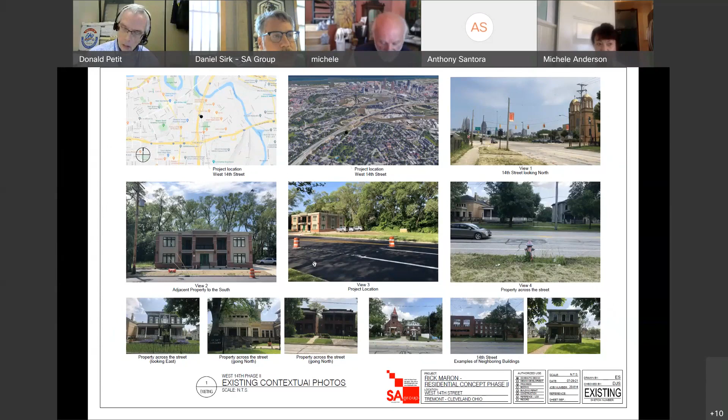I did have someone ask me, somebody who doesn't live in the neighborhood but is in the neighborhood quite a bit, if the first building was public housing. I had to clarify to her, no, it's Airbnb. Are you going to continue with the Airbnb concept for the second building?

I'm not sure if Rick is on. I see him logging in again. That would obviously be a question to my client. Yeah, I understand, concerned about the parking. Can you hear me? Can you hear me now? Yes. Okay, I'm back, I don't know how to close the app because I keep getting an echo.

But in any case, I am having communication with the neighborhood about the Airbnb that we've done on phase one. So that's an ongoing discussion. We're meeting with the company and also the economic committee in the next week and a half.

And also for Mr. Santora, I heard the communication. We have gone to Tremont Landmarks, and that's what Dan was referring to that made the changes to this presentation. We will then take your recommendations back to Tremont and then back to you again. So there are still two more landmark steps to go, just to make that clear.

I want to be very clear that there is only one landmarks process for approval of these buildings, and that is our process. Understand. Yeah, you're right, totally understand. I just want to be clear so it's not confusing and we run into, 'oh well they approved this, why aren't you approving it.' There's only one process - I've been down this road many times. I totally understand what you're saying. Okay.

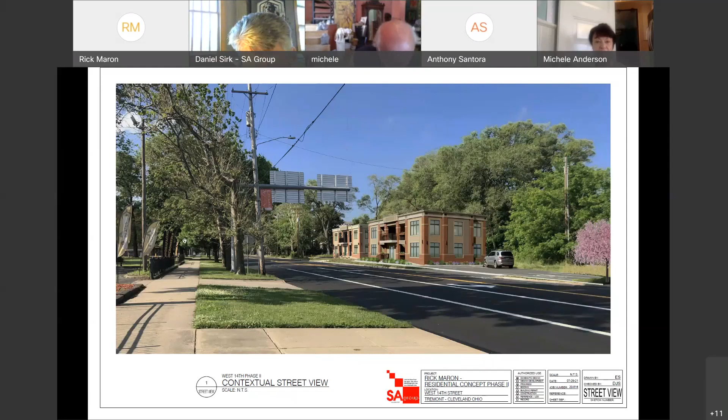Okay, thank you. So what action should we be taking, Mr. Petit? There's no action to be taken today. This is just concept review and comment and direction, so there's no motion necessary.

If I were going to answer that, I would say phase one is already working with that single driveway as we speak. Unfortunately, people are pulling over on the vacant area too often, but we've already worked that out on phase one. For phase two, it's actually probably a little easier because the drive is right off the street - you turn right into the parking spaces. What I will say is this is a tight spot. It's totally understood. We have met the zoning requirement of the 6 spaces.